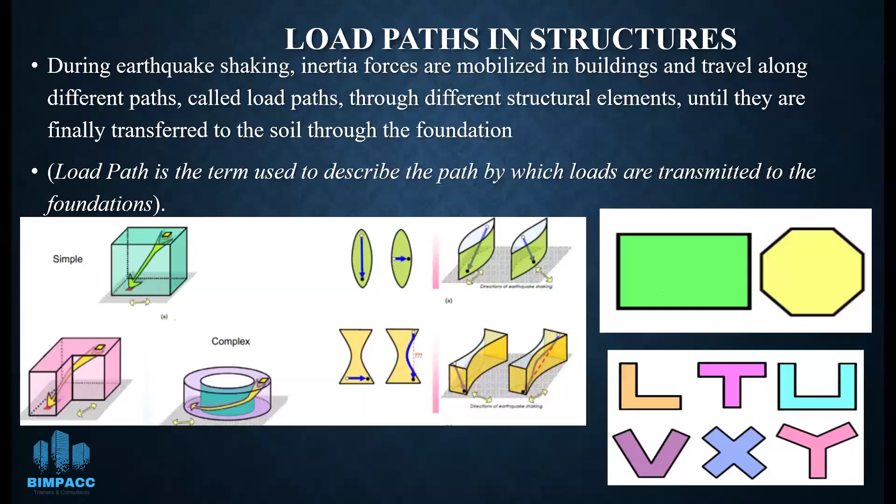If you have a simple and symmetrical building, then the load paths are very easy. But when you have a complex building, you might have different sorts of load paths. So in your field, it is not necessary that you get an ideal type of arrangement based on the site requirements, and as per client requirements, you can get any type of shape. With the advancement in the field of civil and structural engineering, any type of building is now possible, and you can go for any unsymmetrical shape, which I will explain in the coming slides.

So moving to the next slide, the major structural elements in a building are the frame members, that is the beam, column, and slab, and finally the footing. The non-load bearing elements can be cladding walls, partition walls, the glass facade, or any architectural finishes used in any type of building. The loads in the building may be dead loads, live loads, hydrostatic and soil loads, and snow loads.

These are classified as the static load. And in the dynamic category, the major loads are wind loads and seismic loads, which are generated by earthquake actions.

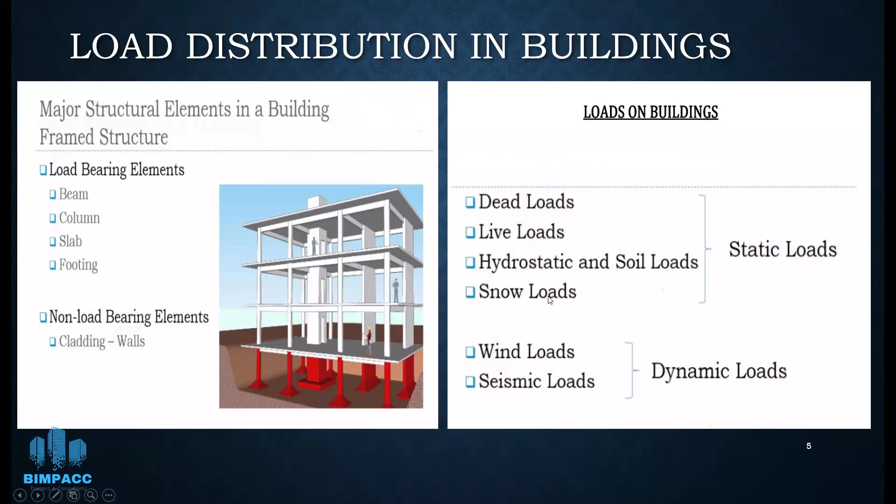As you can see, the building's behavior depends on the type of loading. One is the gravity load and the other is the lateral load.

In the gravity load, the loads are the self load of the building, the different furnitures or occupancy, and the finishes. These are classified as dead load, which remains static throughout its life. The other is the lateral load, which is the wind or earthquake action, and these are also transmitted to the building.

So if you do not consider the lateral load effect, the building will be resisting only the gravity load, but not the lateral load. So both of them are important.

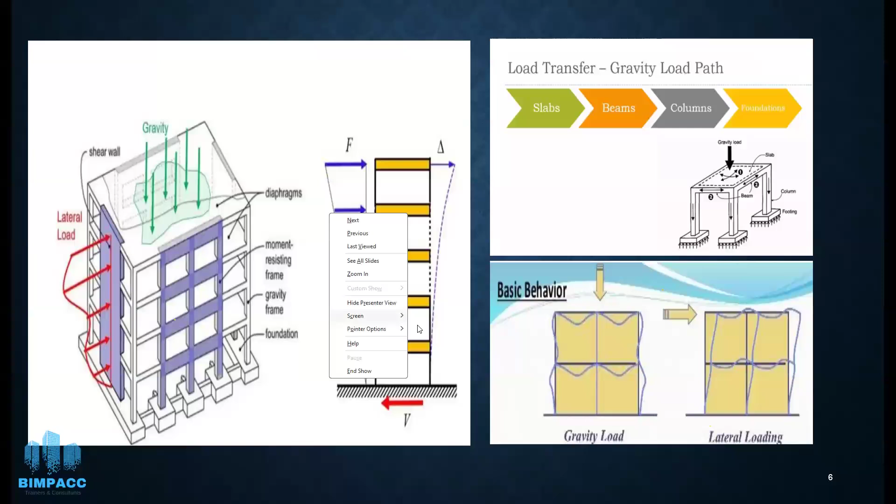The various methods of structural design: one is the classical working stress method, which is based on the allowable material strength and controlled by deformation limits. It is very obsolete and not used nowadays.

The latest was the ultimate strength design, where you factor your loads and design the building based on the factored loads. But the latest trend is performance-based design, which considers ductility, deformation capability, and load capacity at large deformation.

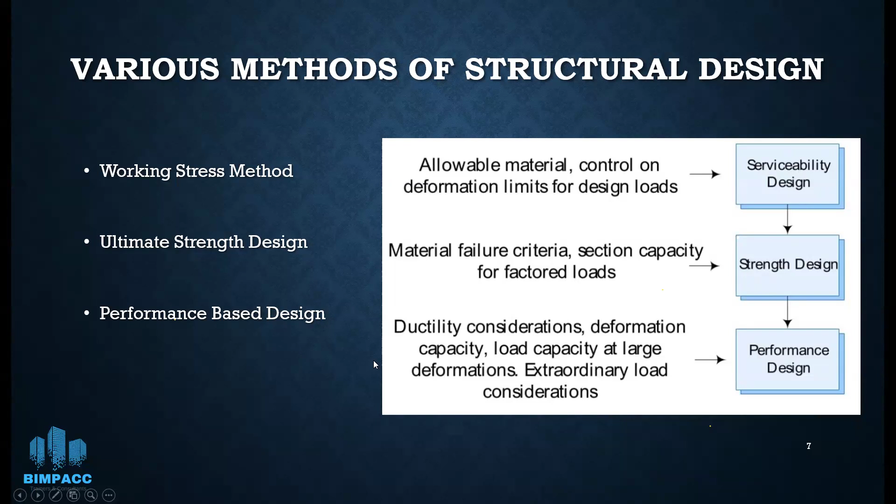In simple meaning, performance-based design is based on your desired output, and on that basis you design your building. So it can be any shape, any level, and any type of material used. There are no limits, and you can go for any type of construction as per your requirement.

The structural systems can be gravity load resisting systems or lateral load resisting systems. They may be a slab supported on load bearing walls or on column beams. If you have a combination of beams, one is a primary beam and the other is a secondary beam, and the beam can also be supported on walls or columns.

In the lateral system, it can be a single system such as the moment resisting frame, the brace frame, shear walls, tubular system, or the dual system, which I will explain in the following slides.

So you can see different images of buildings. These are the latest construction techniques used, and you can see that any type of geometry is possible with the advancement in performance-based earthquake engineering.

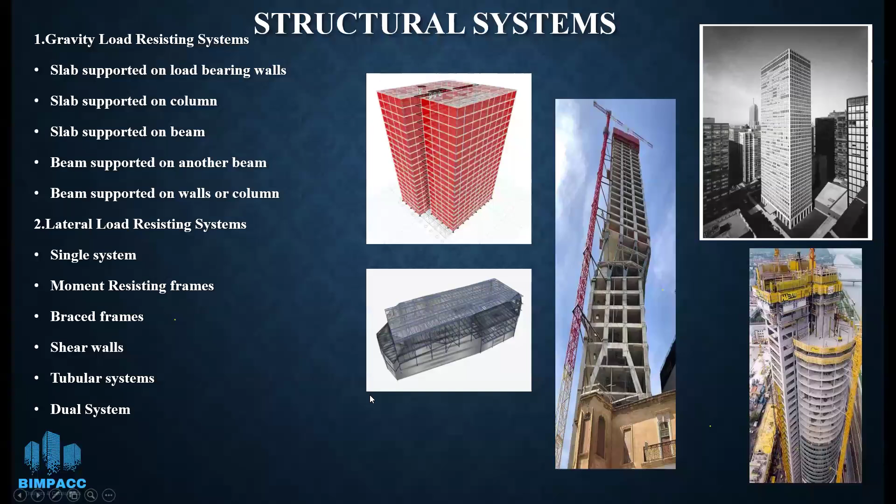Now, what is the wall bearing system? These are the classical residential houses we see, in which the masonry walls provide support for all types of loads. It is mainly used for residential purposes where we have light loads and low seismic zones, and their capacity is a maximum of 2 or 3 stories.

So they don't have much lateral load resistance, and they are just for light loads only.

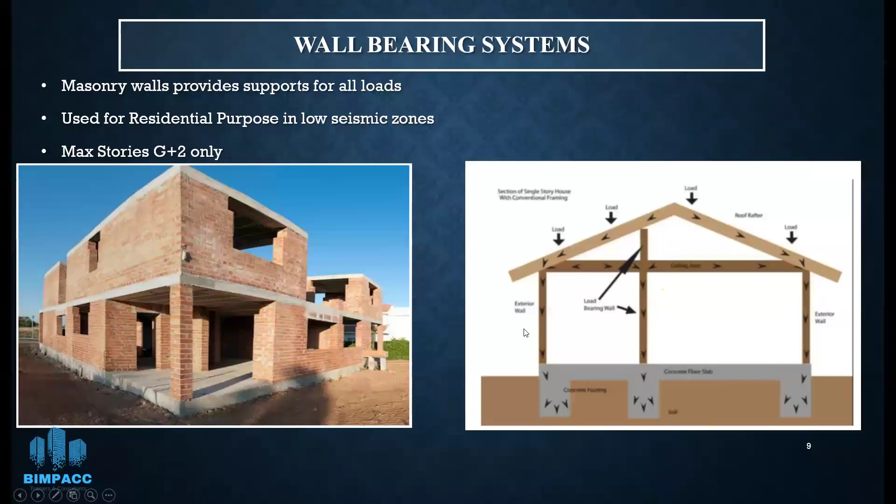Now there are moment resisting frames, which are an assembly of beams and columns rigidly connected to one another. They provide lateral resistance through the rigid frame action and give a great deal of flexibility in planning, meaning no braces are required. However, their performance is very sensitive to the detailing and workmanship at connections.

The bad aspect is that they are expensive, with a lot of materials and labor-intensive work required. Large deflections can lead to high non-structural damage in earthquakes, for example, the 1994 Northridge earthquake.

The code has different performance levels: immediate occupancy, life safety, and collapse prevention. Collapse prevention does not mean the building will collapse, but it is on the verge of collapse, and you have ample time to get out of the building.

But what happens is that the non-structural elements, for example the architectural finishes, furnitures, or walls, collapse, and this can cause two types of problems. Either they block your passage of escape from the building, or due to their falling, they become a source of hazard for the public inside. So the safety of the building is important, but the safety of the public is also very important.

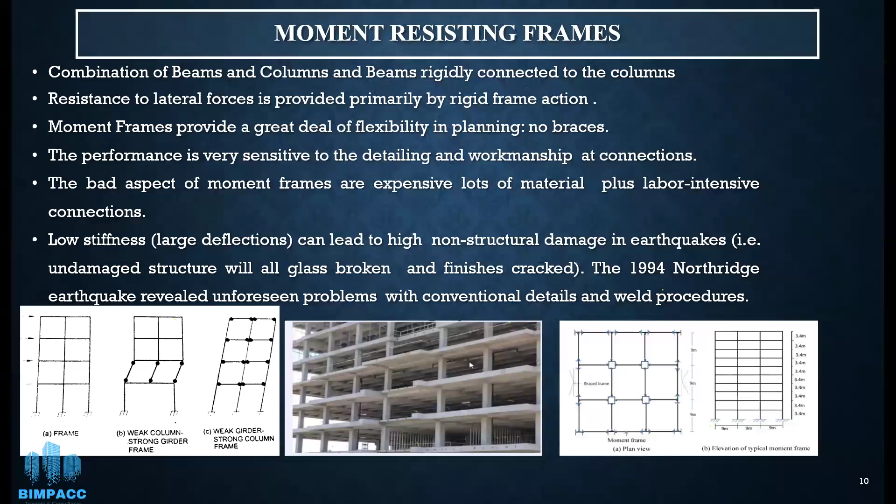The other system is shear walls, which have vertical members capable of resisting horizontal forces through their capacity, and they provide stiffness. If you have stiffness irregularity, it affects your stiffness, and you can get better results by addressing it.

This is an option when you have limitation in the size of the beams and columns, and you have no other option. Along with that, if the client also has the provision, you can then go with the shear wall, which enhances the stiffness and performance of the building in case of strong earthquakes. And with that, you can also go for high-rise buildings.

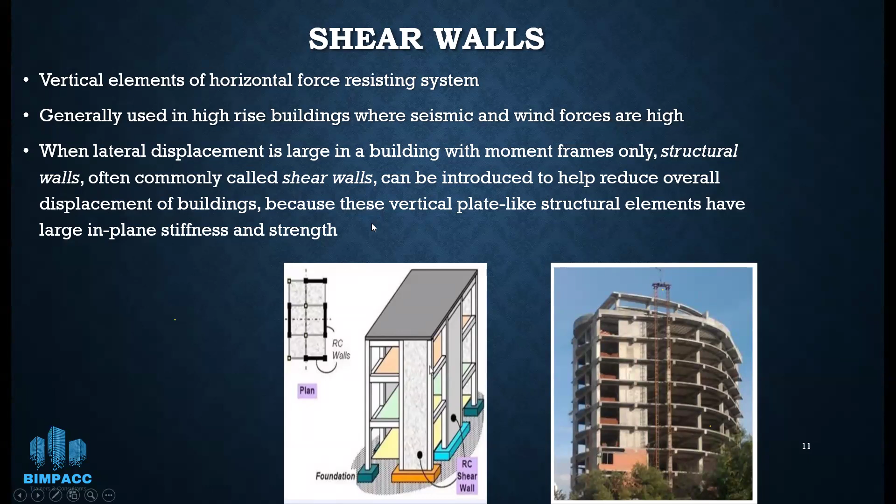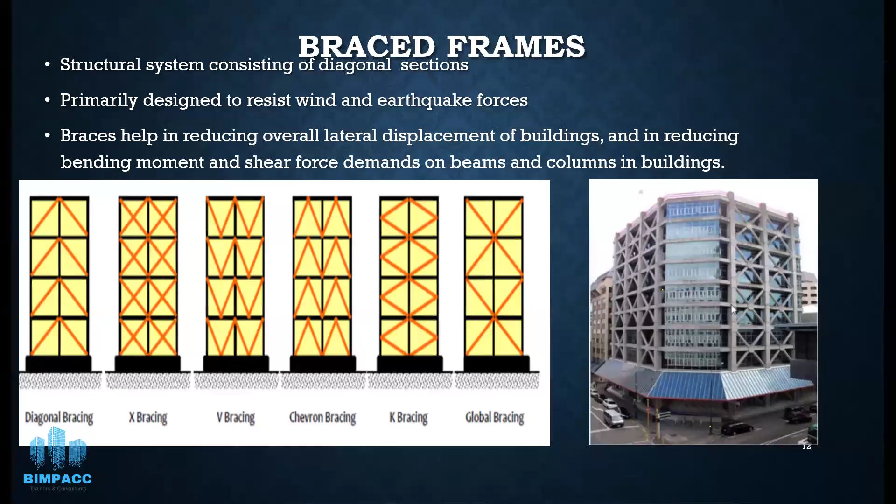The other is the brace frame. It is the arrangement of different braces. You can have the diagonal framing, the X bracing, the V bracing, and a combination of that as shown in the picture. They help in reducing the overall lateral displacement of the building and reducing the bending moments and shear force demands on the beams and columns. So they act as a reinforcement, reinforcing your members and reducing the demands on the different beams and columns.

Continue if you have more. Is the voice not coming through? Hello, kindly confirm, is there any issue with the voice? No sir, no Dr. Zeeshan, your voice is clear.

Please continue. Okay, in the high-rise buildings, when you have more than 100 stories, then they can be called as high-rise buildings, also termed as skyscrapers.

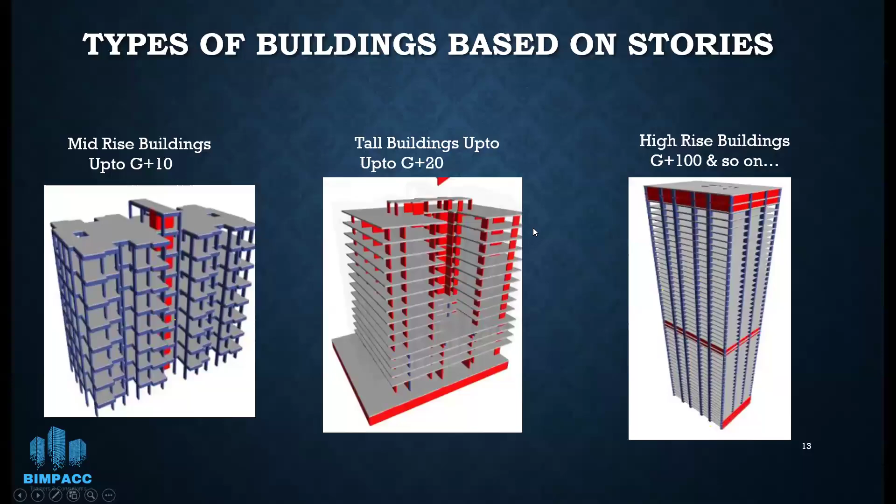Now, what is the tube system? The tube is the name given to the systems where it is constructed in order to resist the lateral loads. You have a central arrangement. This is the same as the shear walls, but in a symmetrical way so that it gives a good stability.

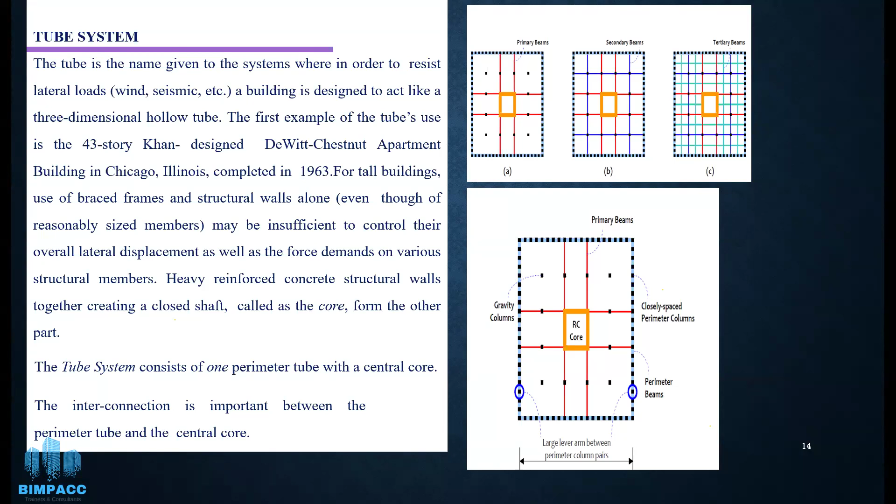When invented, it was used first in 1963 in the USA. They are heavily reinforced structural walls, constructed in a shape which is also called shaft and core, and they give a very good arrangement in terms of the number of floors that can be increased. It has a central perimeter tube, which is also the central core, and their interconnection is important between the perimeter tube and the central core.

Now, the frame type tube system: one is the bundle tube system and the other is the brace tube system. The frame tube system, the most common being the old damaged or destroyed building of the World Trade Center, in 2001, which was at that time the tallest building in the world. It was based on this frame tube system. Based on the number of stories, you can either have a rigid frame, the frame shear truss, the belt truss, and you can go on with any type of arrangement. So this was at that time the most common practice, and the tallest building was constructed using this analogy.

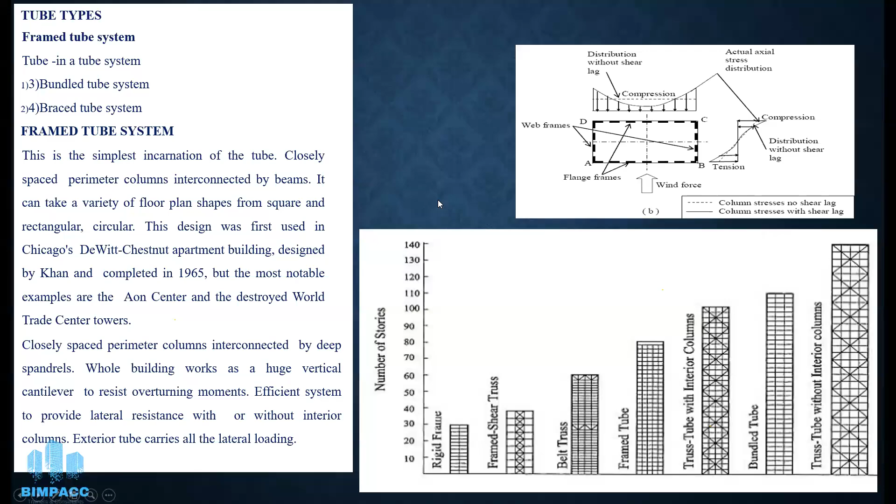Now coming to the bundle tube, if you have visited or seen the Burj Khalifa building in Dubai, it is currently the tallest building in the world, spanning about 828 meters in height. It is a combination of this bundle tube. With the advancement in structural engineering, you can see that the cores are now not necessarily in the central location but also scattered along the different perimeters. This is all based on performance-based earthquake engineering.

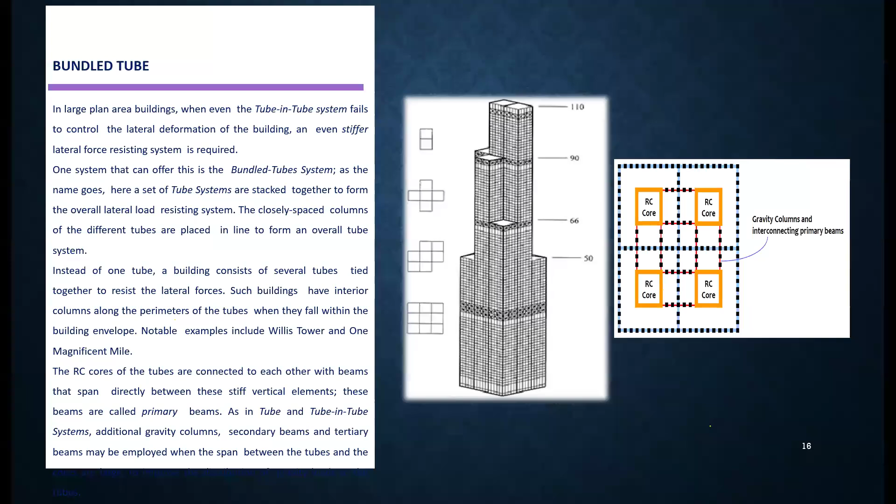Another important thing to highlight is that this building was constructed or designed using the ETABS software, which is a very powerful software. To further advance in this field, currently Saudi Arabia is constructing a building which is taller than this building, about 1 kilometer, 1,000 meters. So any sort of invention is possible in the field of structural engineering.

Now the brace tube system, it has different braces, and just like the truss arrangement, it gives stability to the building. They are also used for high-rise buildings.

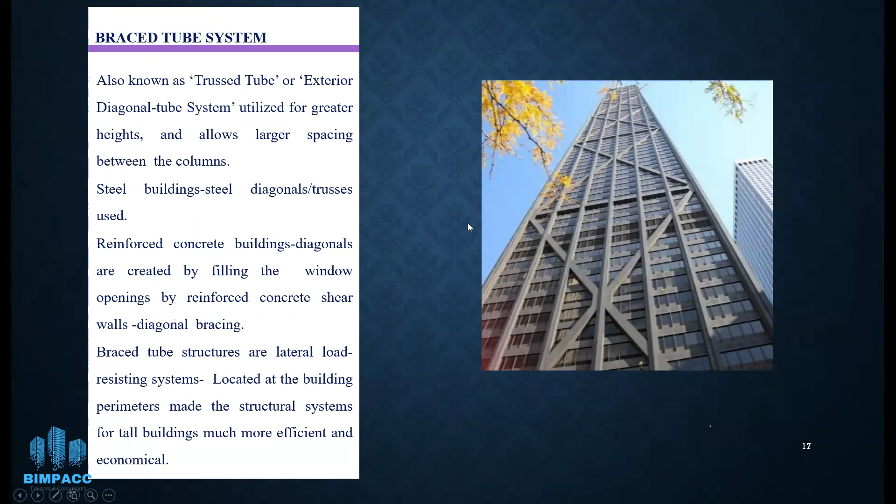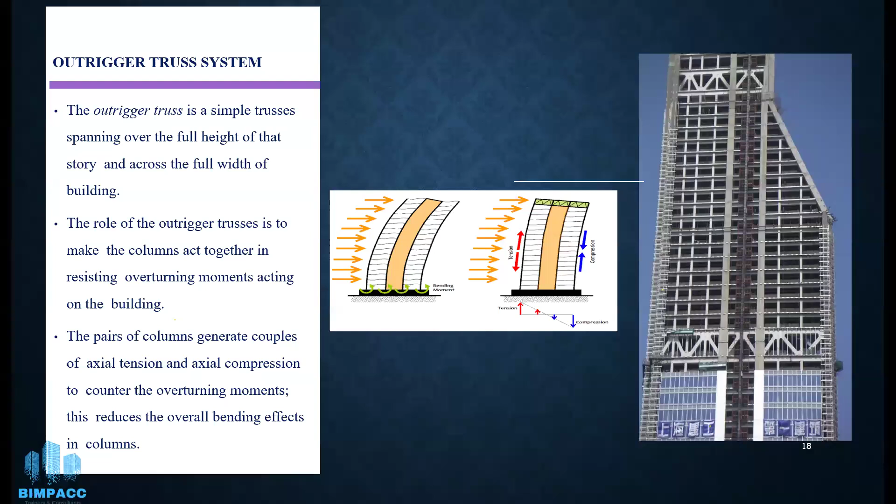Now another is the diagrid system. You might have seen this sort of pictures on the internet. It is a diagonal grid, a framework of diagonally intersecting metal, concrete, or wooden beams used in the construction of buildings and roofs. It requires less structural steel than a conventional steel frame, and it is modeled as a beam subdivided longitudinally into different modules. This is an exterior structural system in which all the perimeter columns are eliminated and consists of only inclined columns on the facade of the building.

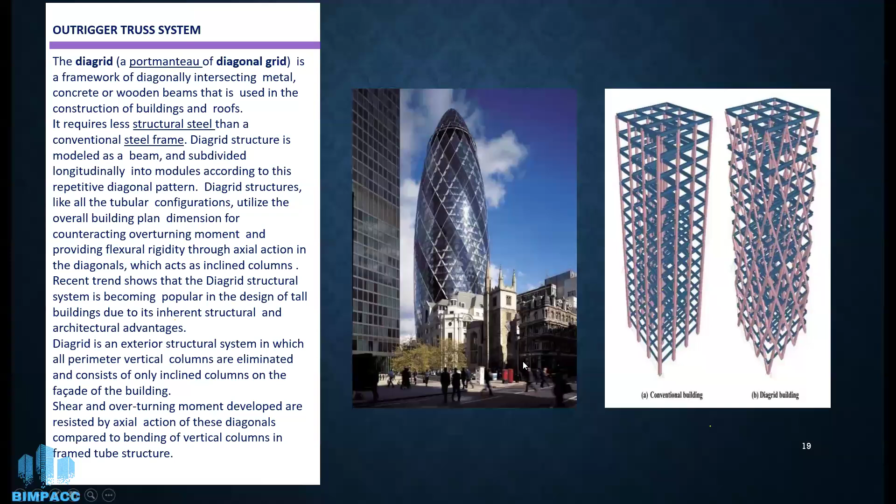So these are all the inventions in structural engineering using the performance-based earthquake engineering technique.

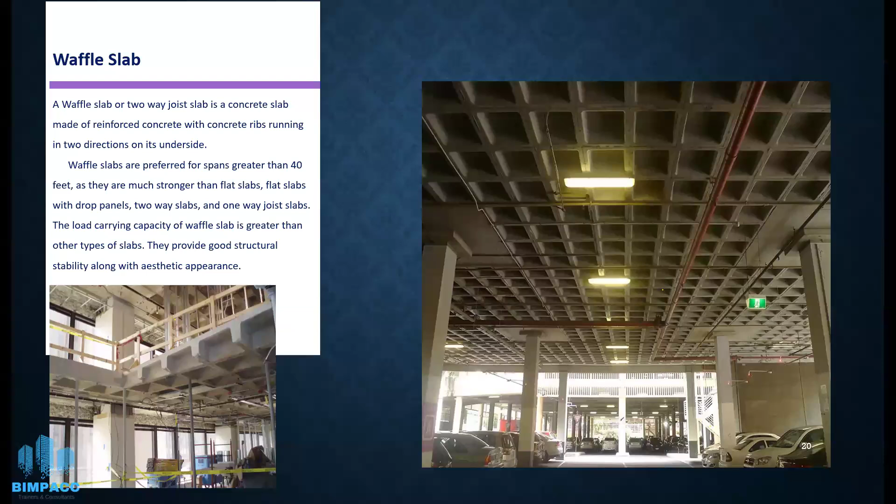Now coming to the slabs, you might have seen these waffle slabs. This is commonly used in places when you need to skip the interior columns, and they are basically two-way slabs. For longer spans, they are used in commercial halls, which have this sort of arrangement.

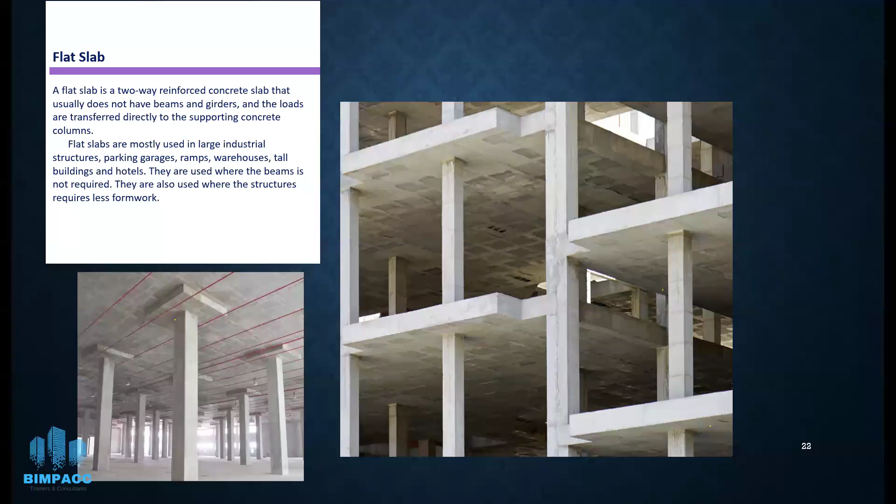The other type is the flat slab, in which you also don't have interior columns. The main advantage of the flat slab is that if you have a room of any dimension and want to change the wall, you can discard that wall and later place it again. The important aspect is the punching shear, which must be calculated and should not exceed the design limits, otherwise punching failure occurs. It may have a drop panel or not, and if there is no drop panel, it is called a flat plate.

Now, the different torsion irregularities. One occurs when your center of mass does not coincide with the center of rigidity. The center of rigidity is the summation of all the lateral forces and their centroid. When these don't coincide, you have the twisting or torsion effect. Torsion induces shear forces, and along with the shear force, this additional torsion needs to be catered for in the lateral forces, and when designing the ties, you need to check for torsion also.

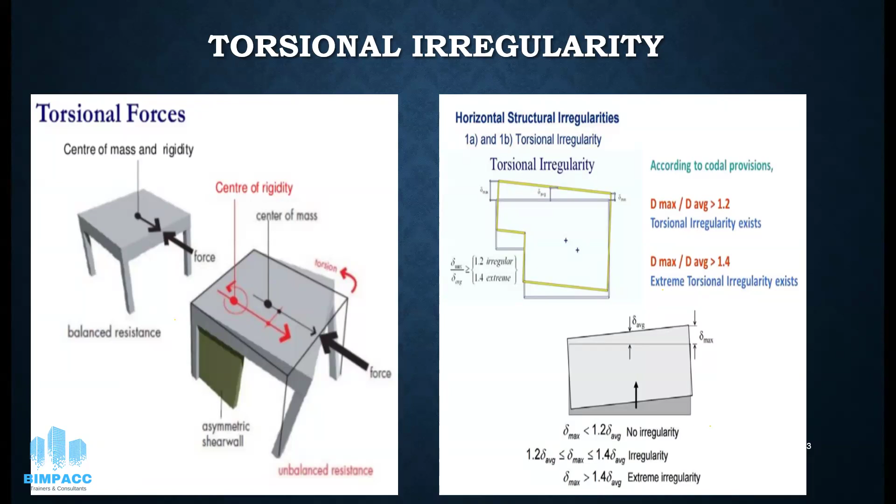As shown in the previous slides, the inclusion of a shear wall helps reduce the gap between these two points, increasing stability and making the building less prone to torsion. For that, codes have provisions that if the ratio between Dmax, the maximum displacement, to the average displacement is greater than 1.2, then torsion irregularity exists. If it is greater than 1.4, extreme torsion irregularity exists. When it is less than 1.2, there is no torsion irregularity. It depends mainly on the geometry and also on the forces acting on the structure.

Now, if you have a properly designed building but less stiffness in the bottom floors, particularly in commercial buildings with open spaces for people to come in and out, and also car parking, you have non-provision of walls, which causes the soft story effect. In the following slides, I will show images of buildings that are properly designed, even with low floors of 2 or 3 stories, but due to this effect, plastic hinges become prominent in the base floor, causing yielding or tilting of the column, and resulting in the building's collapse.

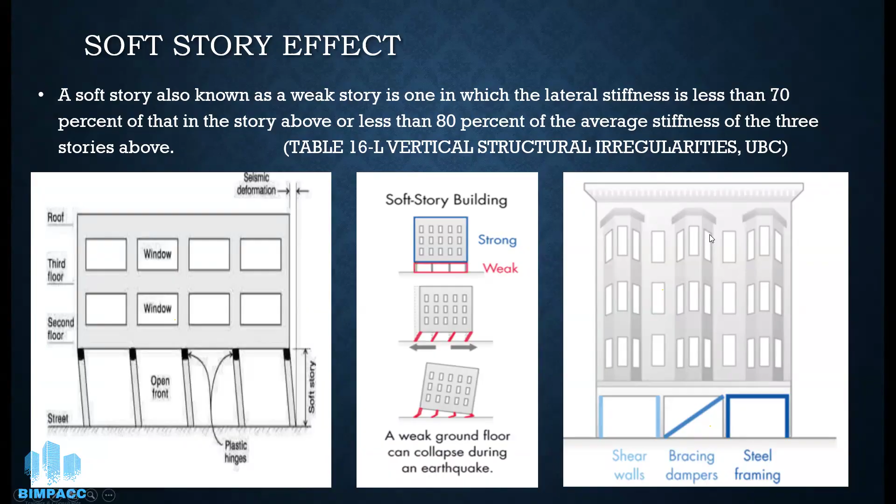The other is the deformation capability. If you increase the number of floors, you get the second order effects, that is the P-delta effects, which is a geometric nonlinearity, and this needs to be catered for in your design.

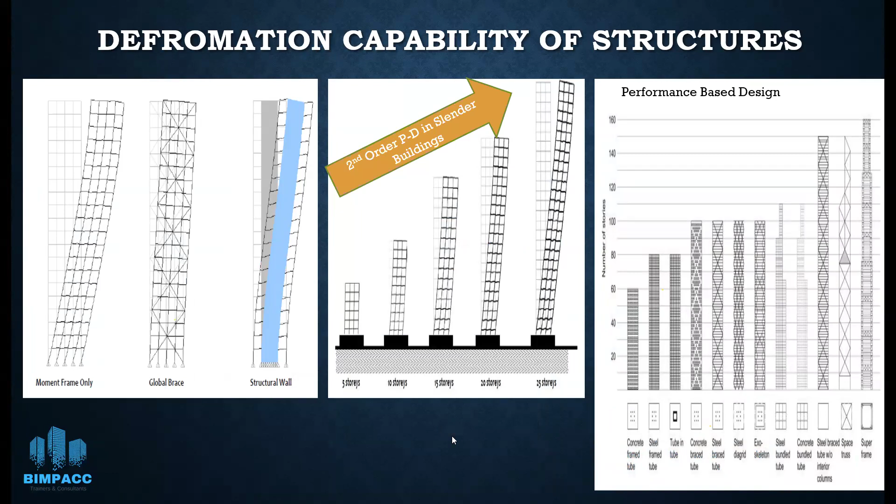Now, what is the weak story effect? As per the ASCE code, a structure has a weak story if the shear strength of the story is less than 80% of the shear strength of the story above. An extreme weak story exists if the shear strength of the story is less than 65% of the shear strength of the story above.

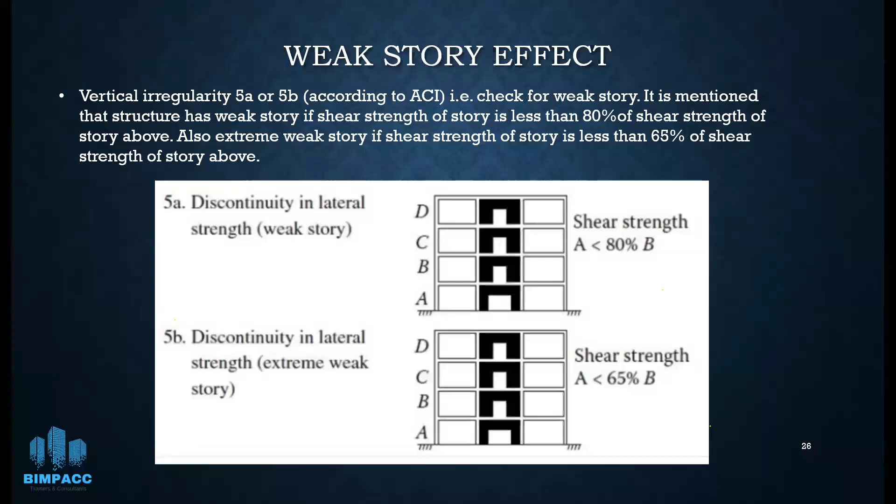Now, coming to the damages, one is the earthquake of Turkey 2003.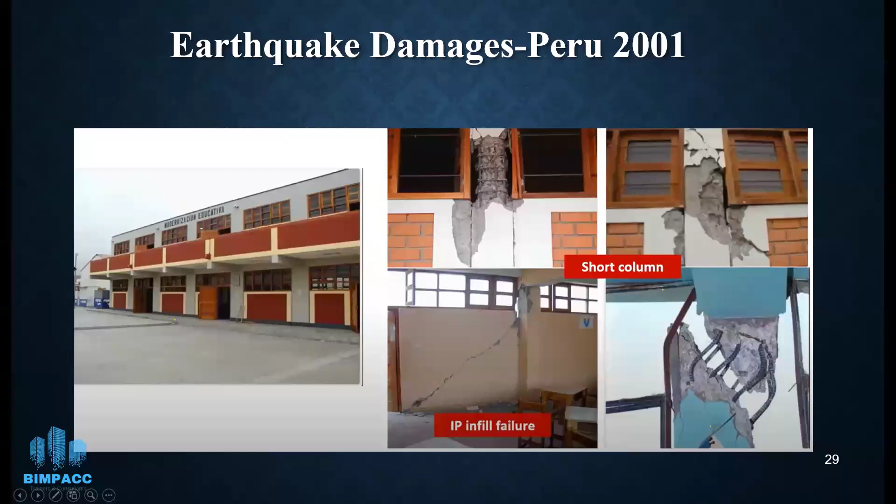So it doesn't mean that once you design a building, it cannot fail in earthquakes. All these effects, as I showed, must be catered for so that their impact is reduced.

Now the foundation is very important, and it is the means by which loads are transferred to the ground. You might have a shallow foundation or a deep foundation. When the width of your foundation is greater than the depth of the foundation, it is called a shallow foundation.

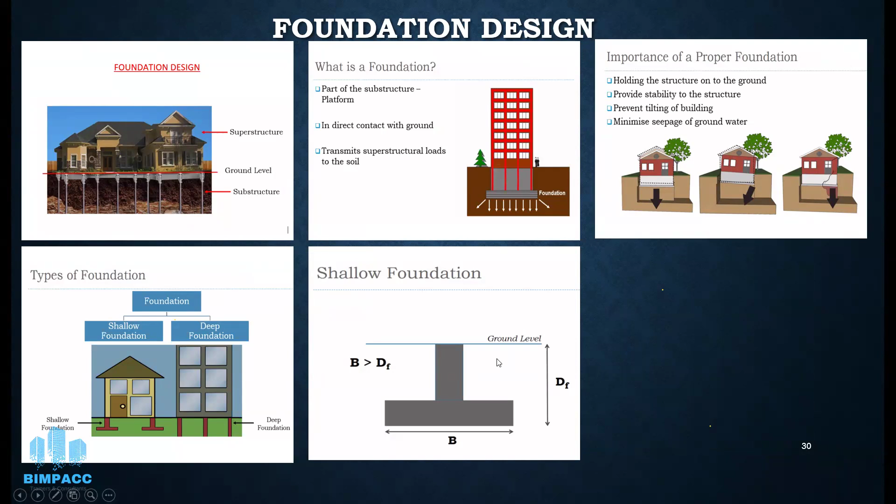On the other hand, when it is less than the depth, it is called deep foundation. The deep foundation may be the piles that we use, mostly in bridges or buildings where the bearing capacity is very low.

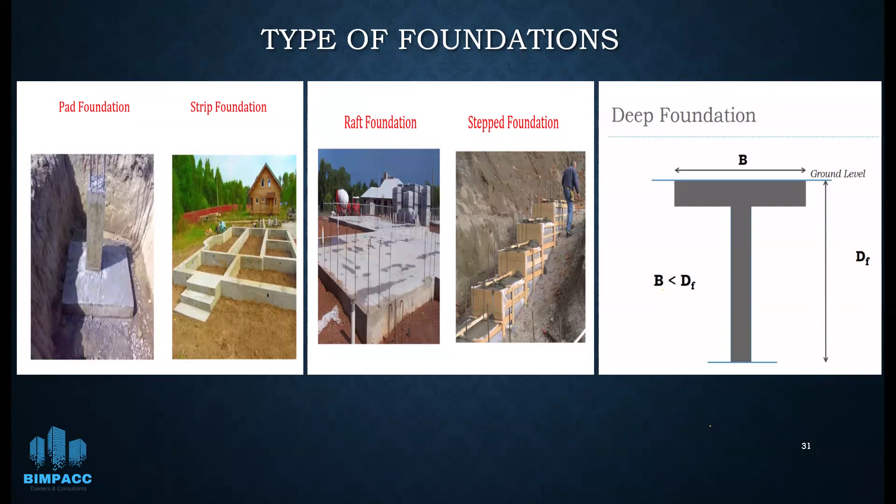For shallow foundations, you might have the pad foundation, the strip footing, the raft footing, or when you have a differential in heights along the structure, then you can go for that type of foundation.

For selection of foundations, when the soil close to the surface is capable of supporting large loads, you go for the shallow foundation. When there is low bearing capacity near the surface but a strong strata deep under the ground, you can go for the deep foundation.

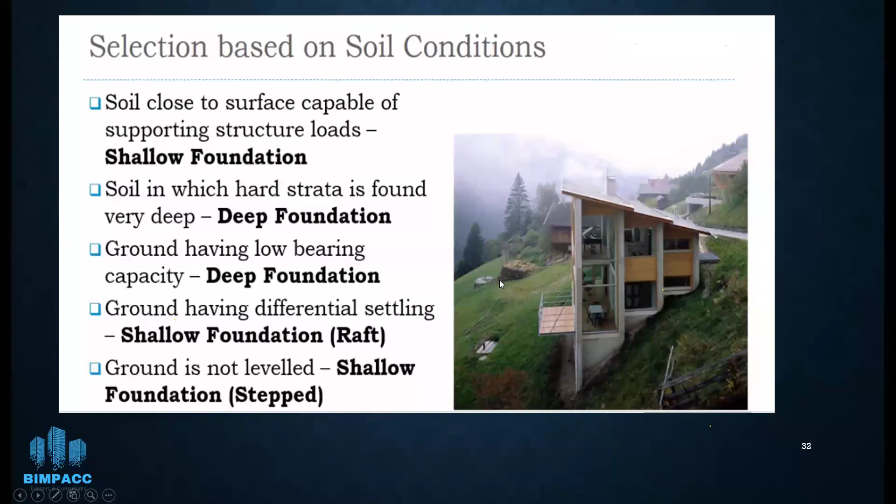So the shallow foundation can be either raft footing or step footing, as shown in the previous slides. If you are modeling using the finite element method and software, you can model the soil as point spring, line spring, or area spring.

Point spring is used when you design for the pile foundation, and area spring should be modeled for the raft or isolated footing. Line spring is used for the beam or strap footings.

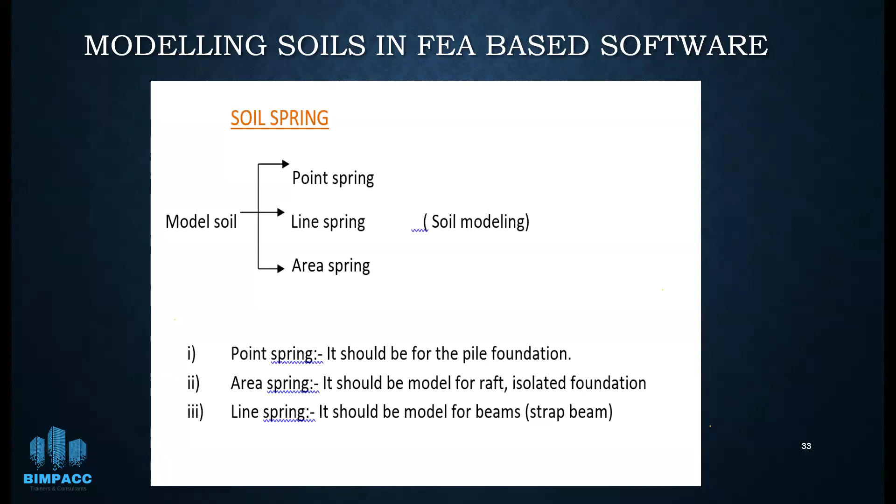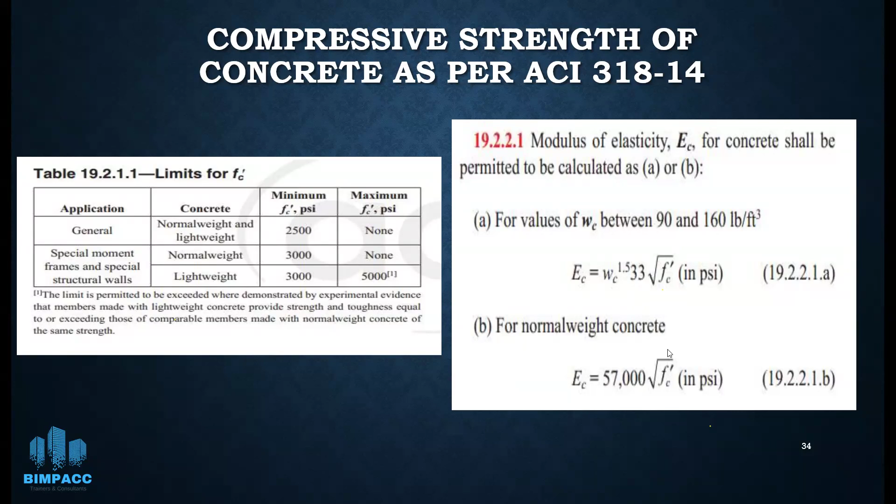Now coming to the ACI code, you might have seen this in your engineering curriculum, but just as a quick refresher: when using lightweight concrete, you can go for this formula, and a different one for normal concrete. Similarly, for the rebars, you can use different formulas as per the ACI code.

If you don't have any idea about the dimensions, you can start with a trial dimension using the column size as h by 10, and based on that, you can then approximate your sizes and check your analysis.

One thing to note from a practical point of view is that the column dimension should always be a multiple of 3, so that it is easy for the fabricator to fabricate the formwork. And if you have a rectangular building, the larger face should lie along the larger dimension.

As per the current ACI code, the minimum column dimension, if you are designing a structural column, should be not less than 12 inch.

The columns should be stronger, and the beams should not be stiffer than the columns, so that the columns are capable of bearing that capacity. If the columns are weak, then they will fail, and ultimately the building will fail.

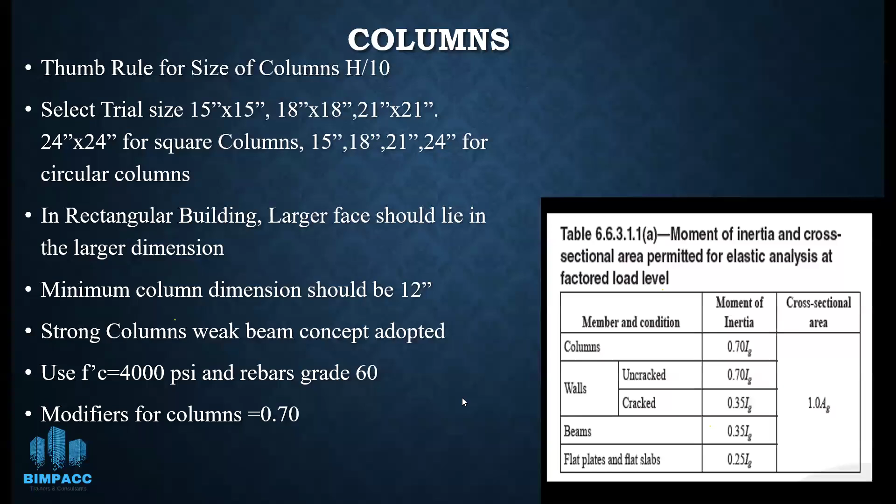Based on the ACI code, different moments of inertia have their modifiers used as per the cracked section analysis concept, and you can use them for your analysis and designing in the software.

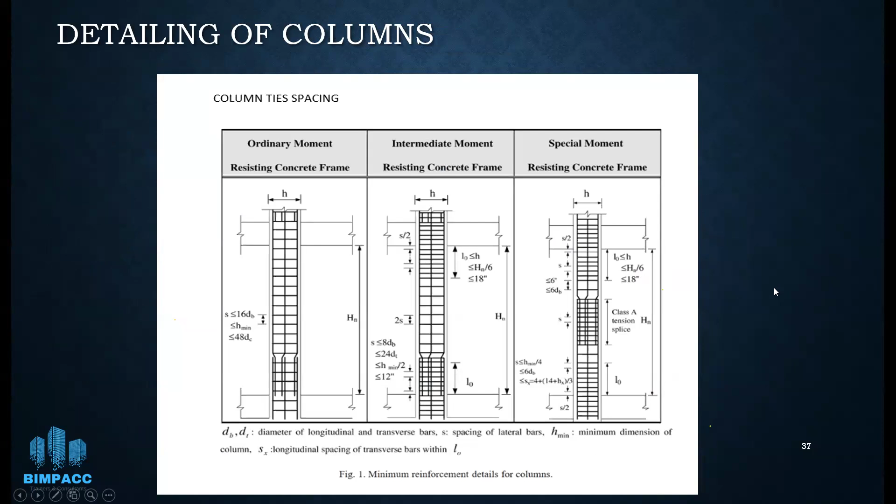Other thing is the detailing of the column. If you are using ordinary moment resisting frames, the detailing should lie at the junction of the beam and the column. If you are using special moment resisting frames, then the overlap should lie at the mid-height of the column.

Now for the beams, similar to the columns, the sizes should be in multiples of 3 inch. If you don't have any design requirements for the strength of material, you can assume it to be more than that of the slab. Typically you use 4000 psi and grade 60, and the modifier used is 0.35, and table 9.3.1.1 gives you the depth of the beam for your analysis.

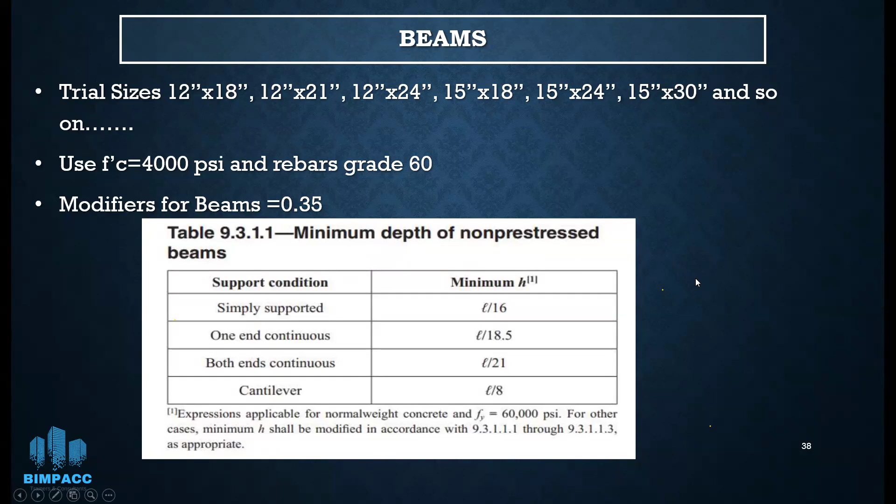Similarly, for the slabs, you can select a trial size for any building. If you don't have any size available, start with 6-inch and do your analysis, then based on the requirements, you can modify your thickness of the slabs.

For the footing, if you don't have any idea about the thickness, the thumb rule is that you can approximate using a 3 to 4-inch multiple. For example, if you have 3 floors, you can use 4 multiplied by 3, that means 12-inch, and approximate your size with that. Based on your analysis, you can then modify it.

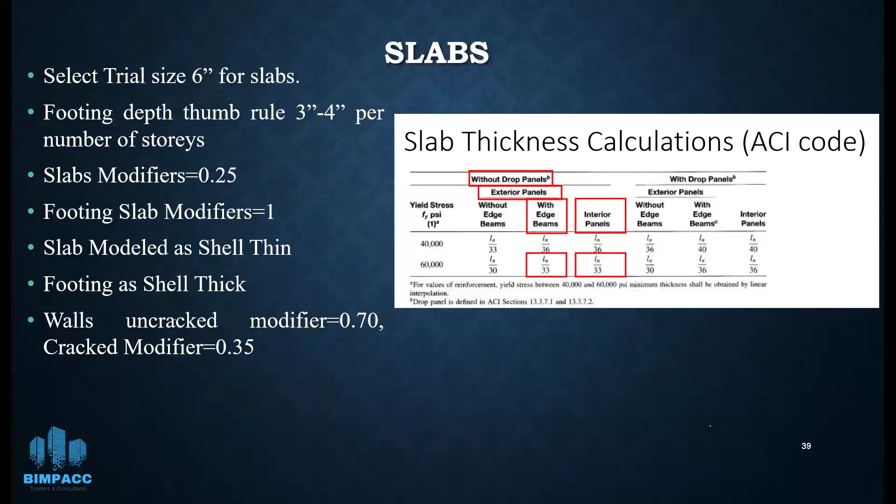Their modifiers are also shown, and their crack moments are also given as per the ACI code. For walls, the thicknesses generally vary between 6-inch and 20-inch, and the trial sizes vary between 12-inch, 15-inch, or 18-inch. If you are using a lift or a water tank, the modifiers are also given. And if the thickness of the wall is greater than 18-inch, then you can model them as a thick shell.

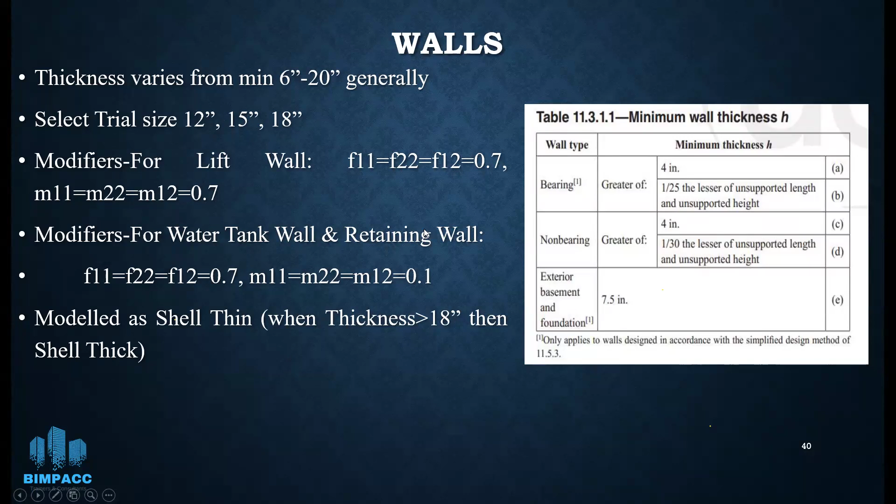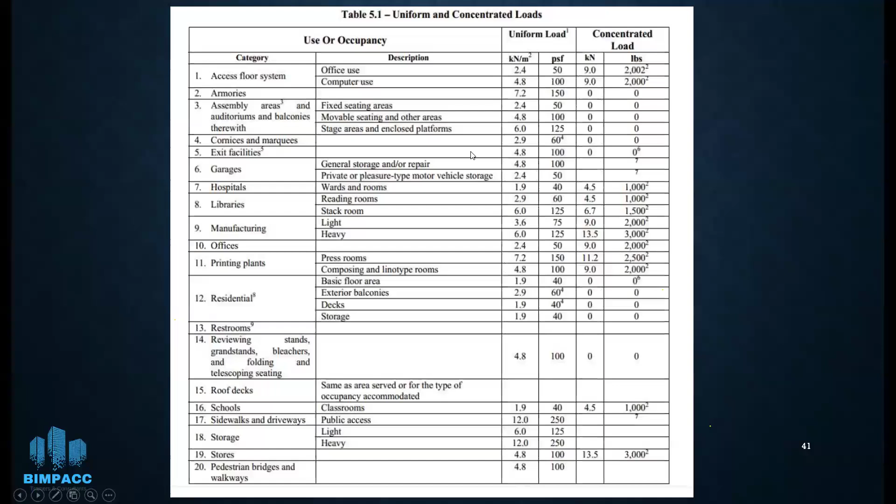Based on the different load occupancies, as per the design of concrete structures by Nilson, and also in the Building Code of Pakistan 2005 version, these are the different floor loads that you can assume in your design. For example, a school building will have a load of 40 pounds per square foot, while a hospital will be different. Similarly, bridges and other types of offices have different loads that you will use in your design. This also applies to the different types of concentrated loads in terms of pounds.

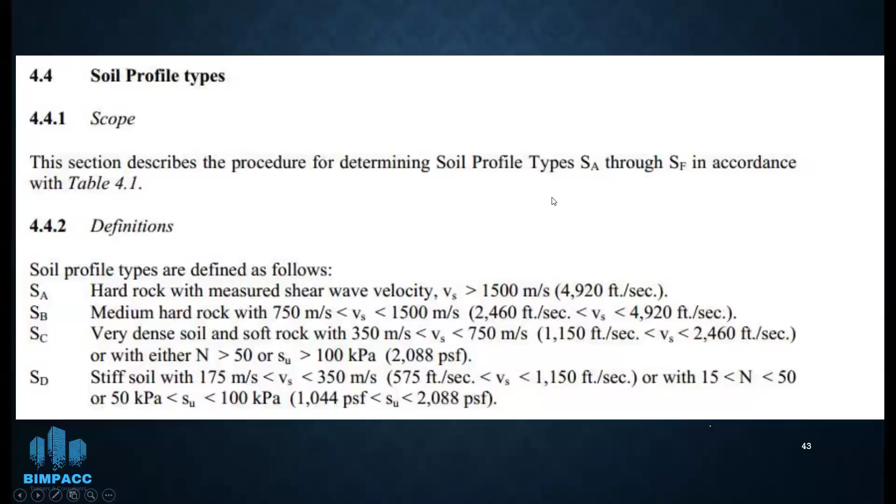The soil profile types are different types of soils. When you have hard rock, you can use SA, medium rock SB, and so on. As you increase the number, the soil type strength reduces, and you get to a very weak soil. These are all based on the criteria used by UBC 97 and also the Building Code of Pakistan 2005 version.

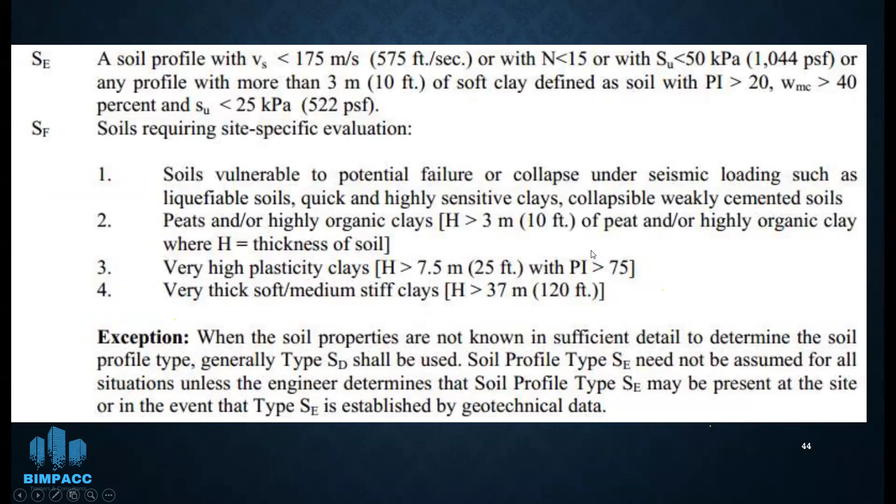In the latest Building Code of Pakistan, they have used the regulations of the International Building Code, which is based on spectral acceleration. You can study the latest version from the Building Code of Pakistan 2021 booklet available online, which is based on spectral acceleration. Spectral acceleration is basically the response acceleration when the time period is known and there is some damping, typically assumed as 5% damping in the building.

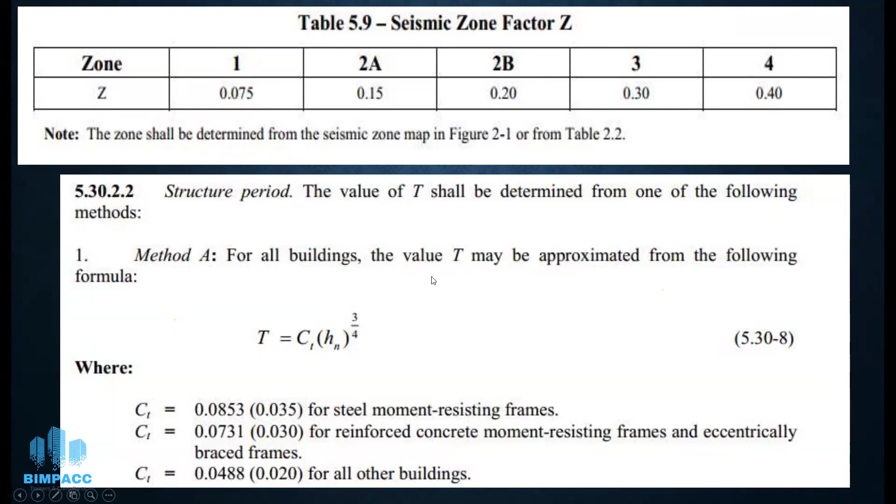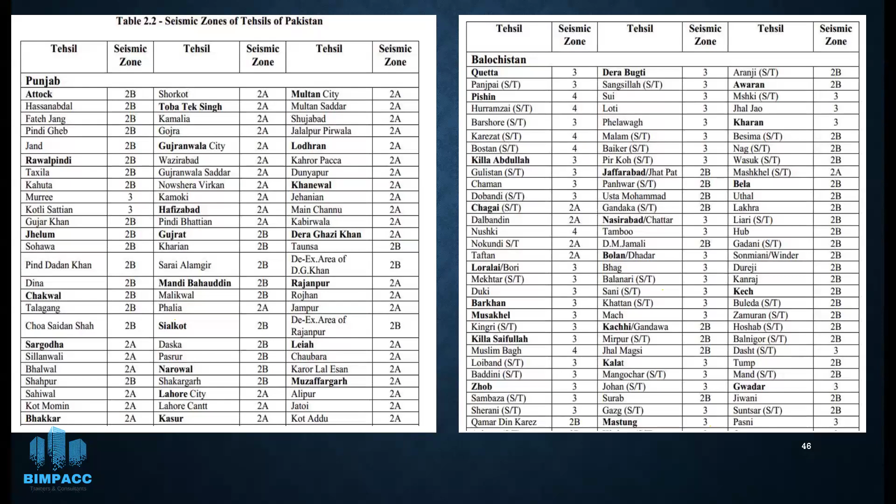Now, these are the different seismic zones as per UBC 97 or the 2005 Building Code of Pakistan. They have different zones, starting from 2A, 2B, and going up to 4. The 4th zone means the higher risk zone, and as you move down you get the low seismic zone. The table and charts are available in the building code, and you can easily see them. In the latest code, they have updated and used different spectral accelerations, which you can also see.

So these are different, and as per the ACI code, they have different load combinations that you can use with the earthquake factors also. For example, if you have a seismic provision in your design combination, you need to multiply all the factors by 1.1 to fulfill the requirements of UBC 97.

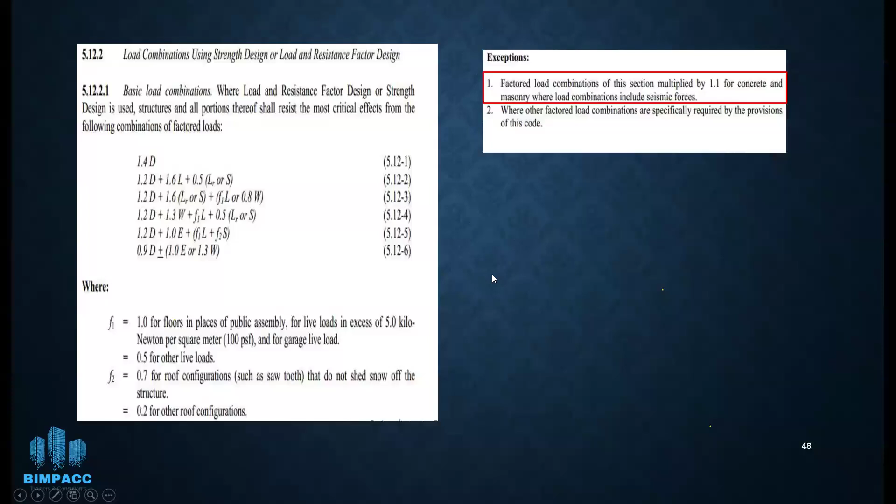After analysis, you can perform different checks, for example, deflection under live load. This is from the ASCE code: drift requirements and torsional irregularity. What is drift? It is the difference between the lateral displacement of one floor relative to the above or below it. If you divide this by the story height, you get the story drift ratio. For the drift requirements, if the time period is less than 0.7 second, use this formula, and if greater than 0.7, use the other formula.

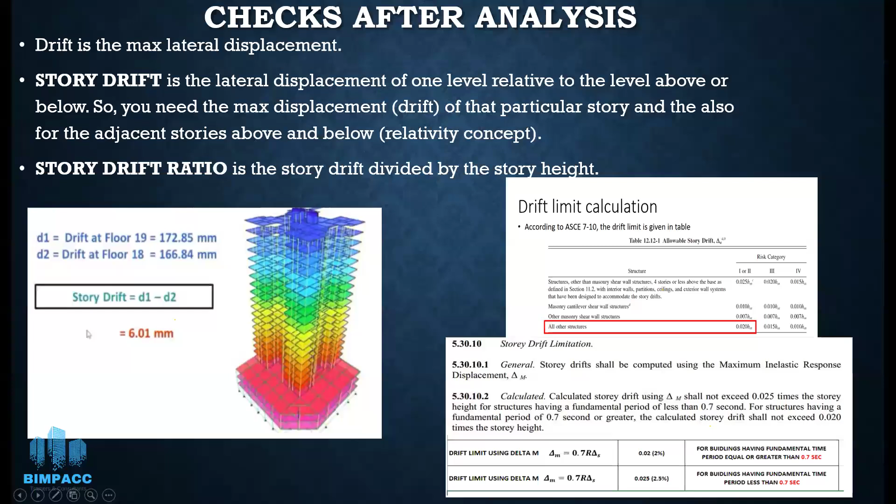Now, design of columns as per the ACI code. These are the different formulas used. The longitudinal reinforcement should be between 1 to 8%. The tie requirements are also shown, and different sizes have different limitations. You can also use the formulas for checking the maximum spacing of shear reinforcement.

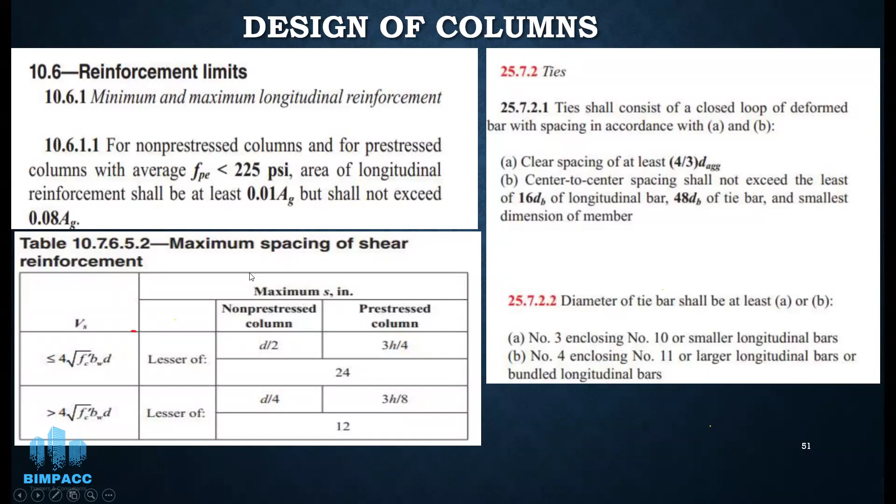Similarly, for the design of beams, there are different formulas given, and minimum reinforcement should be more than this formula value; otherwise, use the formula values. The main bending moment that we use in design is M3, which is about the 3 axis, and the shear force uses V2.

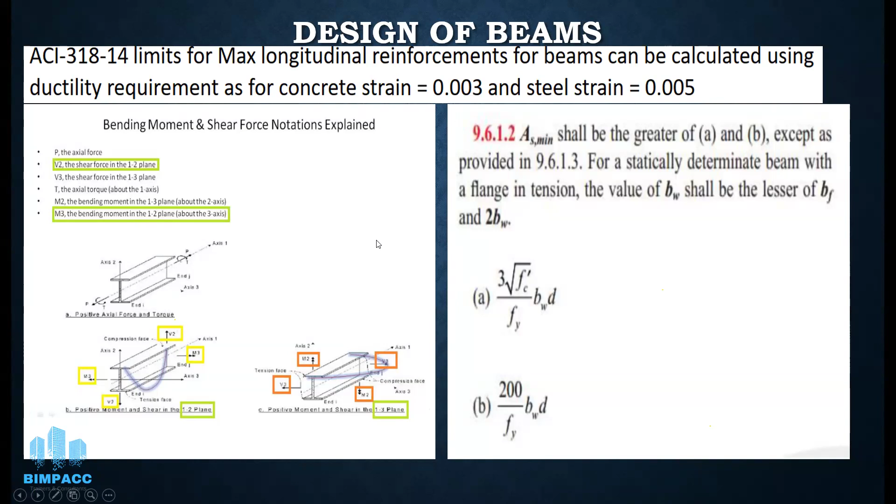So if you are using the ETABS software, you have M3, which will be the principal bending moment used for calculating the area of steel, and similarly the principal shear force will be the V2 force. The shear force requirements for the beams, as per the tables shown, you can use them for your analysis.

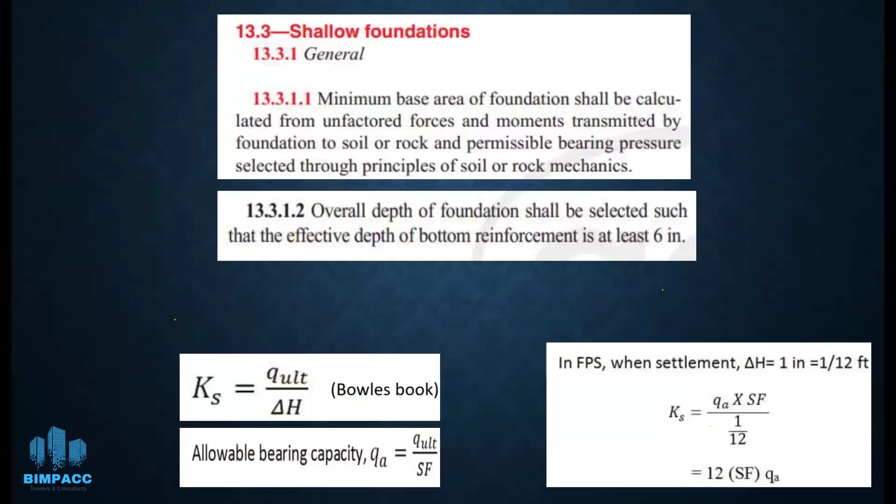Now coming to the foundations, you have shallow foundation. This is the allowable bearing capacity formula; it is the ratio of the ultimate capacity over the factor that we are using. When using the FPS system, the limit is that the deflection should not be more than 1 inch, so for that you can use this formula. For minimum reinforcement, you can use these formulas as per the table given, and for the two-way footing, you can study these provisions as per the code.

Now coming to modal analysis. What is modal analysis? It is the vibration or oscillation of the building under different modes. What is the mode?

It is the shaking of the building under different time intervals as the lateral load acts on the building. So modal analysis uses the overall mass and stiffness of the building to find the various periods at which it will naturally resonate. Resonance is when the time period matches with the fundamental time period, and at that resonant point you get the maximum damages.

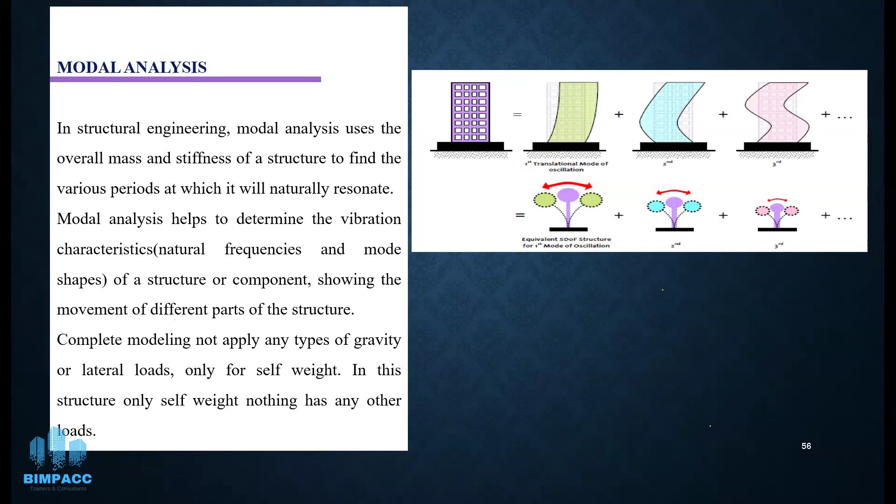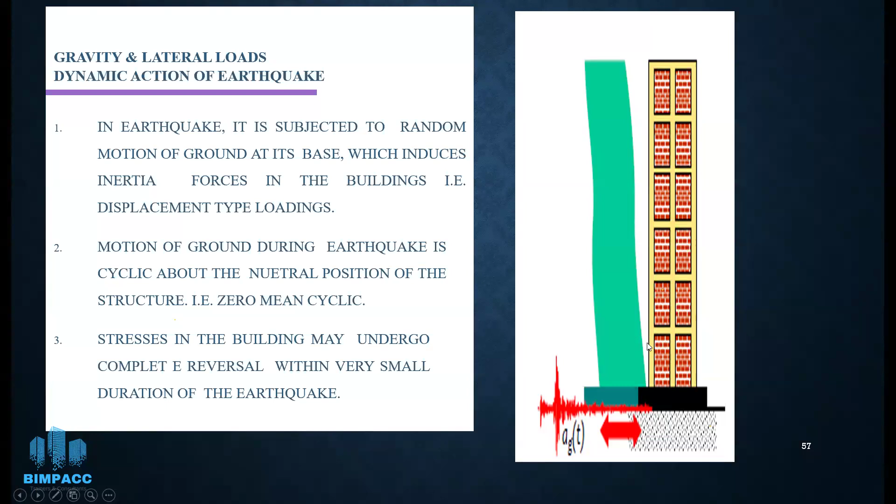So for that we perform modal analysis for critical buildings. The gravity and lateral loads, the dynamic forces, cause base acceleration, and the base acceleration generates shear forces which are then transferred to the building, giving different floor accelerations. From that floor acceleration, your demand in the building can be determined - whether one floor has lesser demand or the other floor has higher demand.

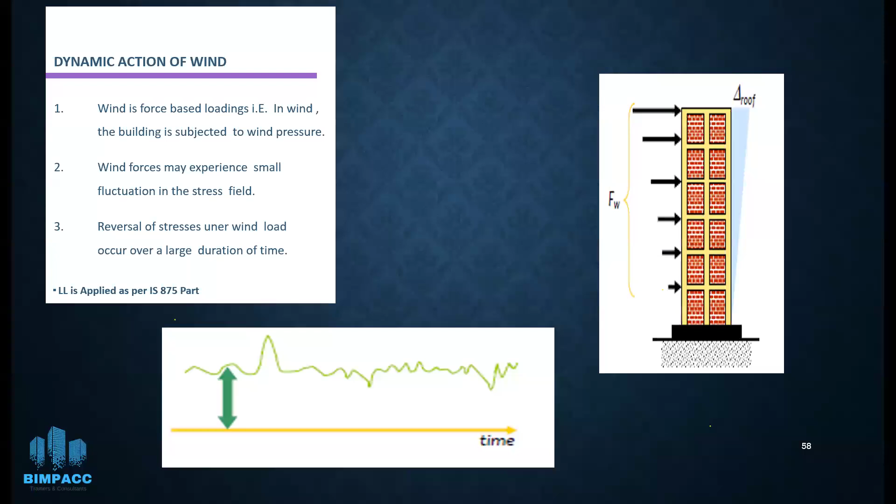Similarly, for dynamic action of wind, you get different forces applied to the building, and from these forces you get the performance of the members. These factors should be considered so that under wind force or earthquake force, the drifts are within the allowable range, so that you don't get excessive drifts causing the sway of the building and causing the failure of the building. Now, diaphragm is very commonly used.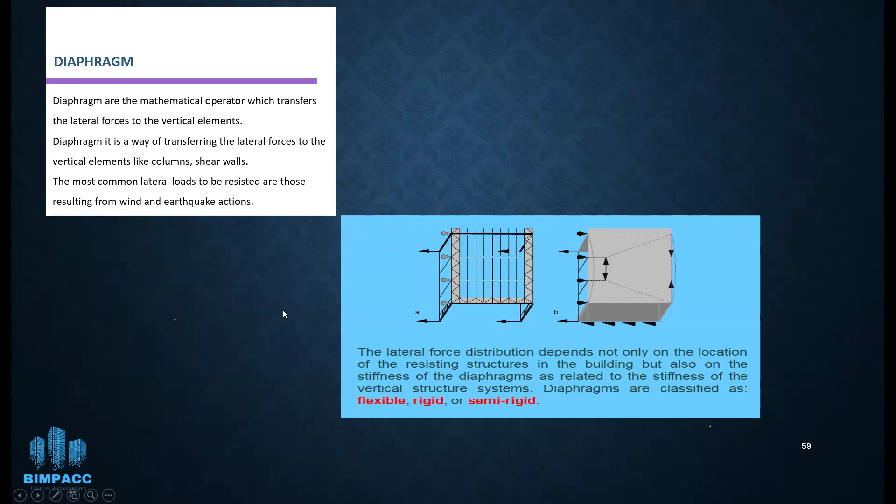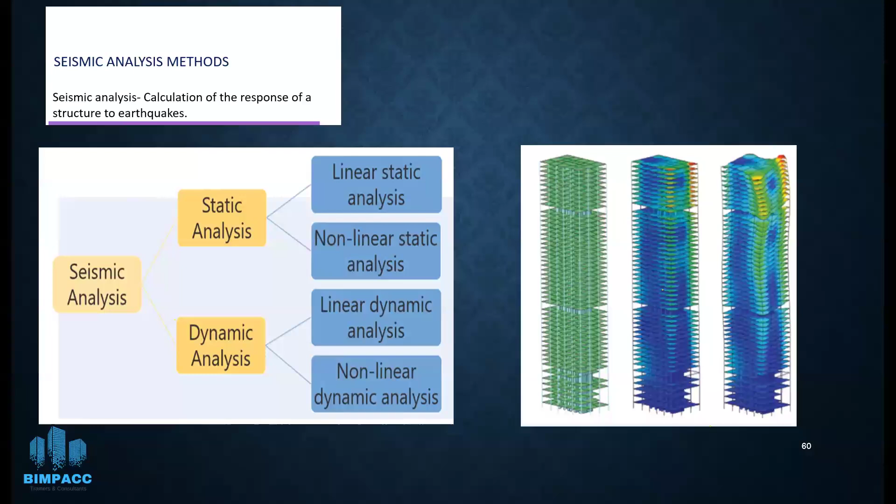The softwares do have these provisions in the dialog box, and they ask you which type of diaphragm you are using. The seismic analysis method can be static analysis or dynamic analysis. The static analysis is the linear static analysis or the non-linear static analysis, and the dynamic analysis can be linear dynamic analysis and non-linear dynamic analysis.

The linear static analysis is the equivalent static method. The design base shear is calculated for the entire building and distributed along the height of the building. It saves time, but it only assumes the elastic nature of the building.

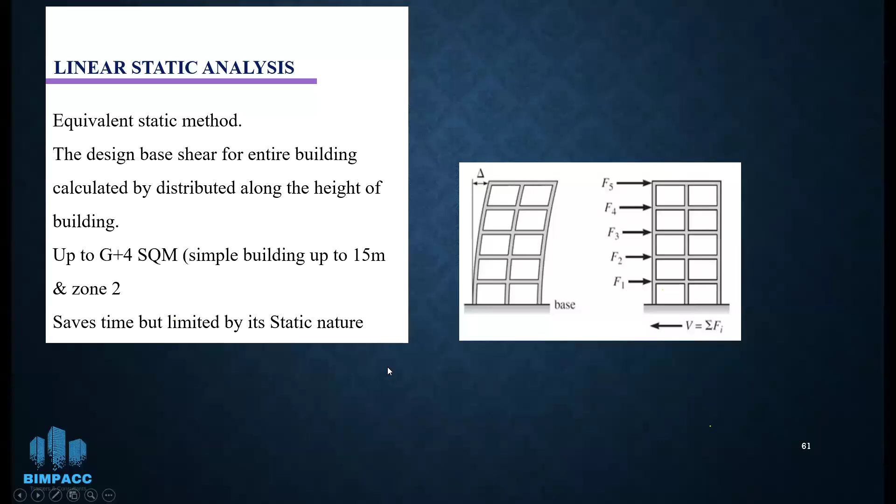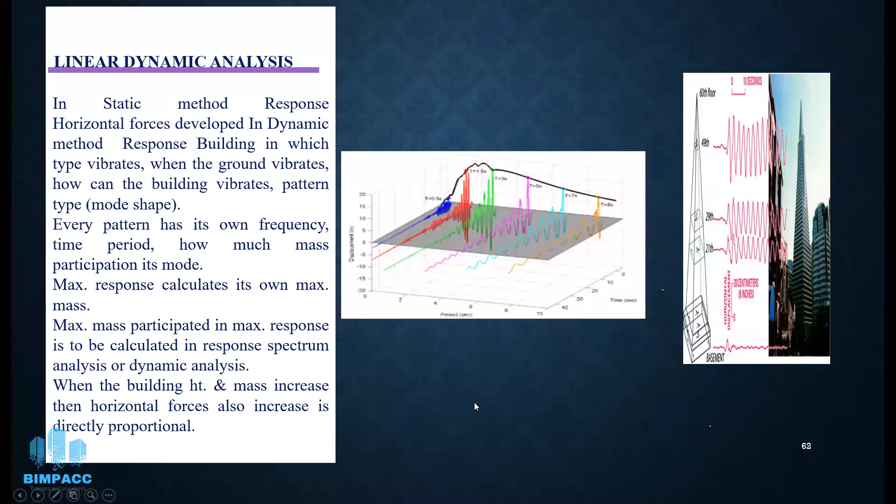In linear dynamic analysis, different mode methods show the responses in which the building vibrates. Each pattern has its own frequency, time periods, and mass participation involved in its mode. The first mode is considered the primary mode, and when you have a number of floors more than one, you have to calculate the participating factor for each mode, then you get different parameters as per the modal analysis technique used.

Time history: in time history we use the actual earthquake ground motion and apply it to our building. For example, if you have different earthquakes - the Kobe earthquake, the Northridge earthquake, or the Loma Prieta earthquake, or any historical earthquake - you can then judge the building performance under real earthquake data.

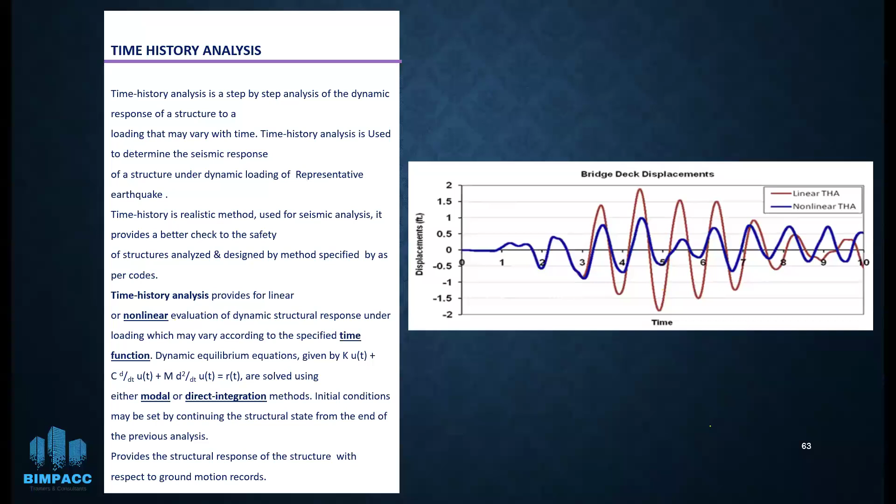So time history analysis is very much recommended, but the problem is it is too time consuming and involves very high computational effort. But to get realistic data, you need to have the time history analysis.

The other is pushover analysis. It is mostly used in research, and it uses different performance levels as per the code - for example, FEMA 356, the Eurocode, NEHRP, or HAZUS - they have different performance levels.

In that, we either use the force control method or the displacement control method. If you are using any one of them, you sequentially apply it, increasing the displacement or the forces on the building, and you reach a point where you get the failure of the building. From that you determine the elastic range, the yield point of the building, then calculate the base shear and ultimate displacement. From that you can get the response modification factor, displacement ductility, effective stiffness, and other parameters - so very useful data can be used.

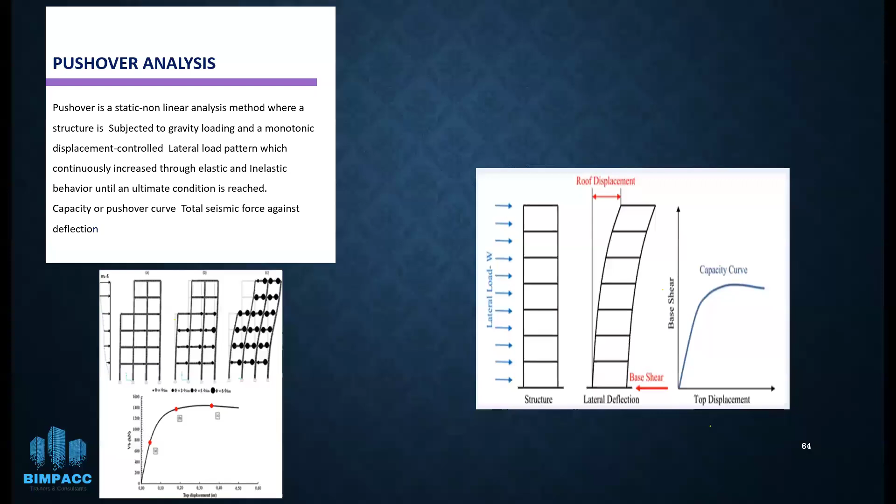And if you want to replicate the pushover data to time history analysis using the spectral acceleration, you can use either FEMA P58, the PACT document, or the N2 method. It can replicate your non-linear static data to non-linear dynamic data, and you can then calculate the engineering demand parameter - it can be story drift, stiffness, or any sort of behavior that you are intended to achieve.

Now, I told you about the short column effect, but the slender column is also not acceptable. You have to have a balanced arrangement. If anyone asks you whether the short column effect is acceptable, you can say no. The slender column is also not recommended. So buckling analysis needs to be performed so that the member does not buckle under the torsional effect, the flexure effect, or a combination of both.

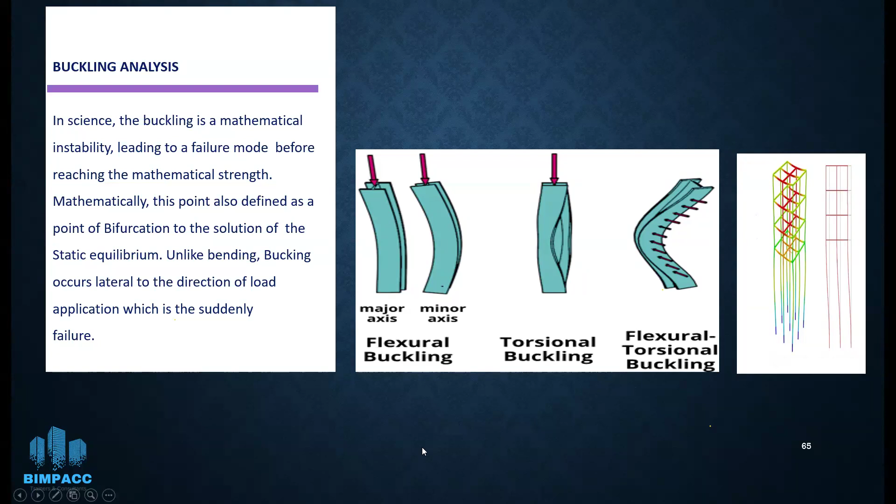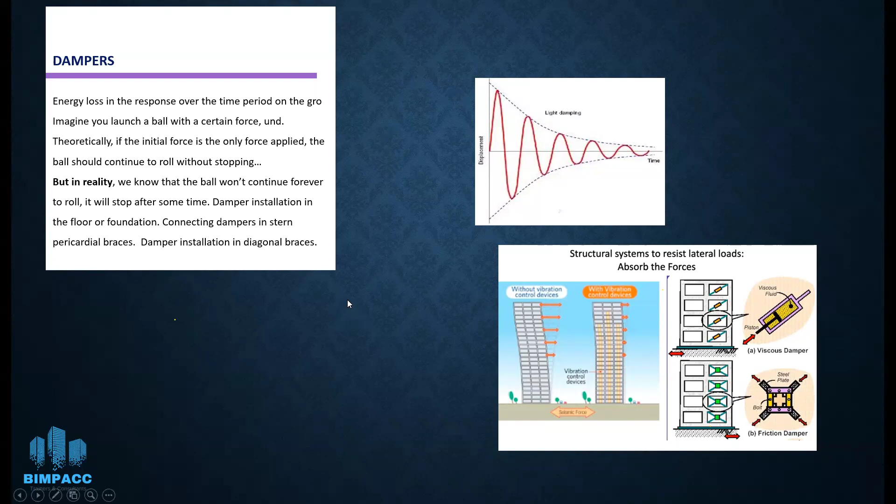Now dampers, what are dampers? Dampers are just like a shock absorber in a car. If you are driving on a road and you come across potholes, you get some vibration. Due to the presence of the shock absorber, the shock is not transferred to you and you don't feel uncomfortable, you only feel slight shaking. Dampers are a similar type of arrangement. A damper absorbs energy and causes a reduction in the oscillation of the building. So they are conventionally used in high-rise buildings so that they can absorb vibrations, make the building more stable, and reduce the demand on the building.

Now, for a different software overview - in some places STAAD Pro is used. The difference between STAAD Pro and CSI software, for example ETABS, SAFE or SAP, is that in STAAD Pro you have to enter the self weight calculation yourself, but CSI software automatically calculates the self weight, so you do not need to enter it.

If you are comparing different software, SAP 2000 is mainly used for any type of structure - it can be a building, a bridge, or a water tank. But ETABS is primarily used for buildings, and it has a very easy interface compared to others, even compared to SAP 2000. Nowadays the CSI company has split SAP into SAP and CSI Bridge - you can use CSI Bridge specifically for bridges, but SAP 2000 still has the ability to design and analyze any sort of infrastructure.

In the previous versions, for example the 2016 version of ETABS, they had a built-in CSI Detailer, so you could also detail your design. But nowadays they use separate software, the CSI Detailer, and you can export the data to CSI Detailer and then detail your drawings from that.

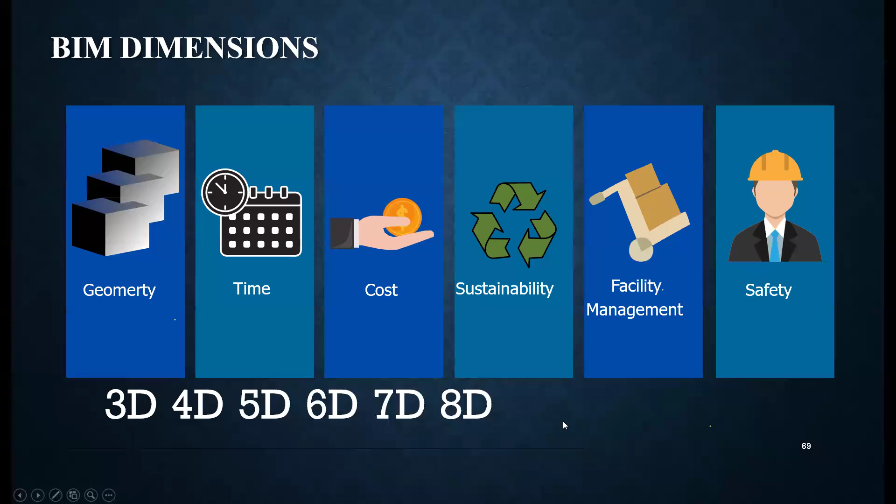Revit has advanced so you can actually visually see the 3D of the building. You can have different clash detections, carry out energy analysis, check for sustainability, do facility management, and also use it for safety and estimation. So it is a very powerful software, and it has eased the work and given you a more practical and realistic view of your model, which is not yet constructed.

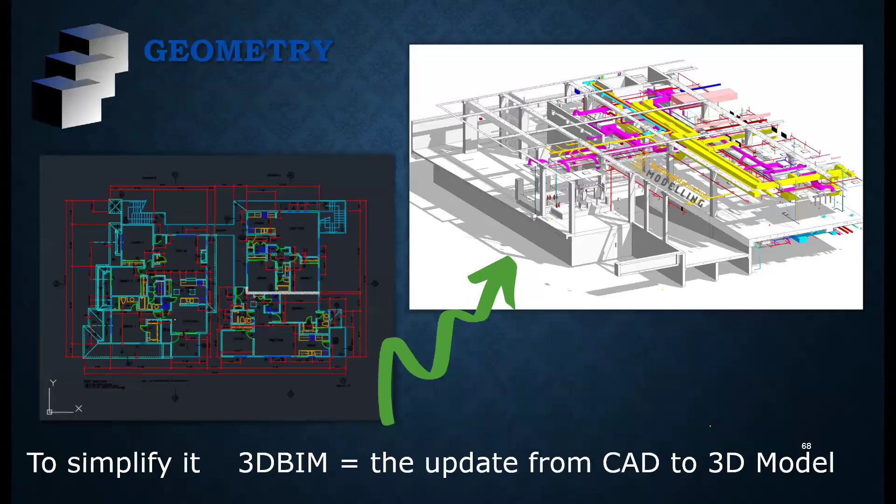सर ये जो आपने कुछ सॉफ्टवेयर पैकेजेस की ट्रेनिंग के हवाले से डिस्कशन की, कि ये सॉफ्टवेयर की ट्रेनिंग जो है वो दी जाती है बिन पार्क के प्लेटफॉर्म से। कोई पर्टिकुलर टाइम है जिस तक कि आती है या इंटरमिटेंटली आप लोग ऑफर करते रहते हैं एज पर रिक्वायरमेंट और एज पर डिमांड? आप ऐसा करें, इसमें जो व्हाट्सएप का नंबर है, इस पे जाके आप ये क्वेरी पूछ लेना। ये डिफरेंट कोर्सेज या इनका जो फेसबुक पेज है या लिंक्डइन पेज है, उस पे ये ऑफर आते रहते हैं। और इनकी अपनी वेबसाइट भी है, शायद वो वेबसाइट यहाँ पे नहीं शो हुई, मैं कोशिश करूंगा कि आपको मिल जाए। तो उस पे ये सारे अनाउंस होते हैं, उधर से आप उसको देख सकते हैं। शेड्यूल अनाउंस होते हैं कि कौन से डिफरेंट इंस्ट्रक्टर्स हैं। मोस्ट ऑफ देम आर पीएचडी लेवल इंस्ट्रक्टर्स और अपनी फील्ड में महारत रखते हैं। तो वो अपने अपने कोर्सेज डिफरेंट टाइमली ऑफर करते हैं। आप किसी भी कोर्स में एनरोल होना चाहें, फिर आप उधर से इन्फॉर्मेशन ले सकते हैं। ओके सर, ओके, थैंक यू।

वेलकम। सो एनी लास्ट क्वेश्चन इफ एनी, अदरवाइज विल... सर जी, आप अपनी पीएचडी में बिजी थे तो इस वजह से स्ट्रक्चर का कोई कोर्स नहीं हुआ, तो क्या आप बता सकते हैं व्हाट विल बी द राइट टाइम टू स्टार्ट द कोर्स, एनी यस स्ट्रक्चर रिलेटेड? मुझे इस पे बहुत ज़्यादा रिक्वेस्ट आई हैं, और आई एम वेरी अपोलोजेटिक टू एवरीवन। लोगों ने बड़ा इंतज़ार किया है। इंशाल्लाह विद इन 1 to 2 month आई विल बी एबल टू लॉन्च कोर्स ऑन स्ट्रक्चरल इंजीनियरिंग। तो इंशाल्लाह फिर आपको अपडेट कर देंगे उसमें।